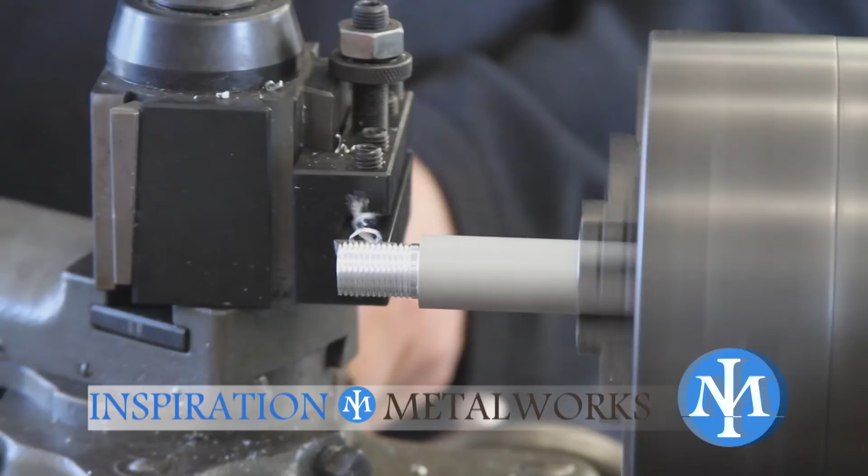Lately my videos have been all work, right? Still working on the frames, ran out of argon for that. Trying to decide if I want to do powder coat or just some other finish. So many things have come up lately, and frankly I needed a break. I needed something a little different.

I did start working on the tops for the tap handles. For those of you still with me on that one, I should have the tap handles in production this week. So the tops are done. Actually, these will get polished, but they're 12 gauge stainless.

Since I had the stainless up on the table, I thought, hey, wouldn't it be fun to do something different? In our last episode I did a poll for people to vote on, and thank you to those who did vote. It basically asked which one I should do: traditional shuriken, batarangs, or why choose, do both. Believe it or not, votes were either for the batarang or for doing both. In fact it was an even split - nobody said just do shuriken, and it was even between the other two.

So I thought, hey, that's pretty indicative of what we should do. I went ahead and cut a couple of these for now. I'll likely cut a whole lot more because it's quick and easy.

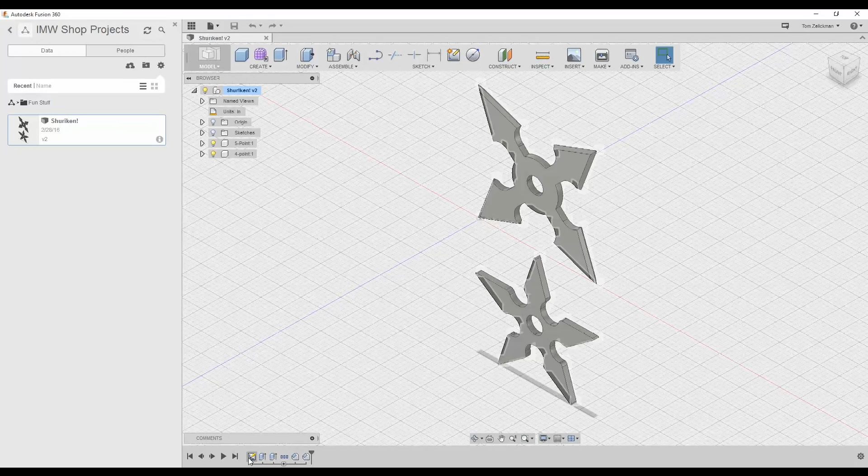Let's take a look at our timeline here, and let's step back. We started with our sketch, right? Let's roll back to the sketch. So here's our sketch - let's make our sketch visible, sorry. And we'll look at it from the front view so we can see it better.

Alright, so our sketch - effectively all I did was import the two SVG files. Those SVG files, the vector files like that, have all the same - it's effectively the same thing that a two-dimensional CAD drawing contains. It has the same thing, right? It's basically text-based, for those of you who didn't know that.

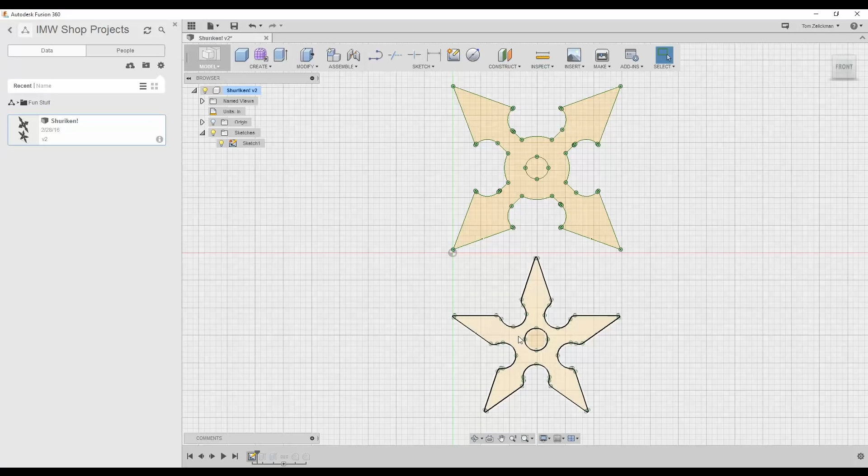Anyways, so you can see I brought that in, and basically we extruded them. Let's go back to our normal view so you can see. So I did the extrude, and then I just started playing around with it - adding different chamfers on here and things like that.

None of this was necessary. The important part here is actually at the sketch level. So let's turn the bodies off.

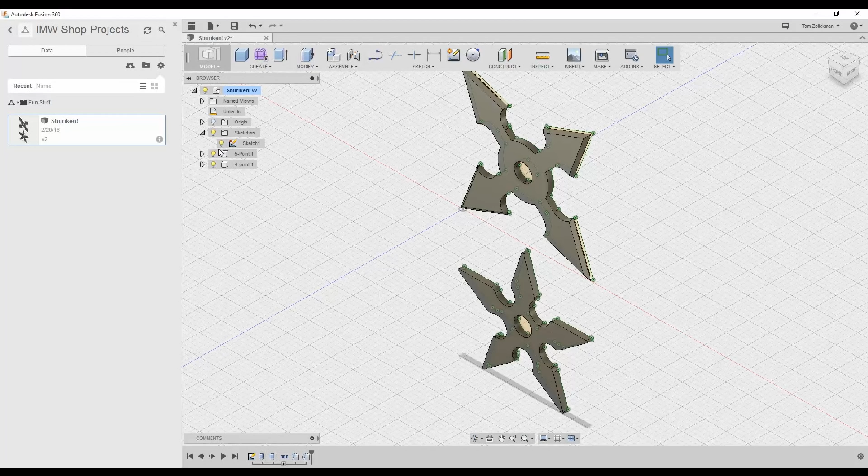We're looking at the sketches because what we need to do is right-click on Sketch and save as DXF. This was the important part for me moving forward because that DXF file is how we're going to get it into PlasmaCam. Everything else was more just to see what it was going to look like. The important part here is this two-dimensional drawing. I could have done this entire thing in the PlasmaCam Design Edge software, but I'm trying to get a bit more experience under my belt with Fusion 360, so I went that route.

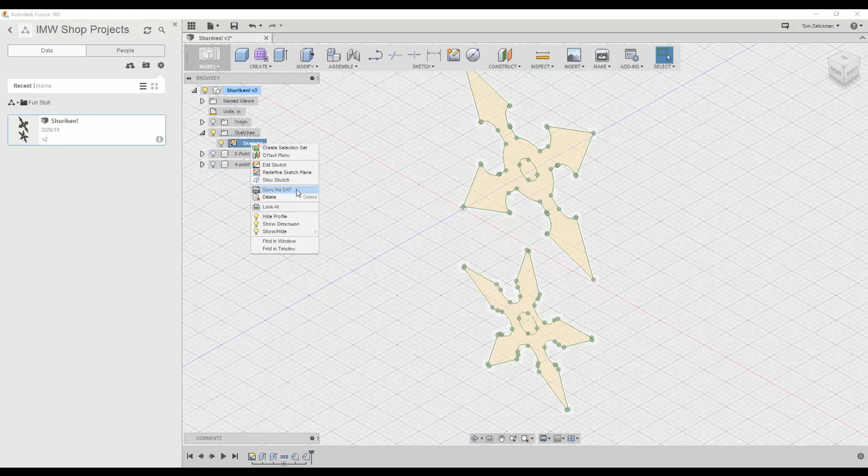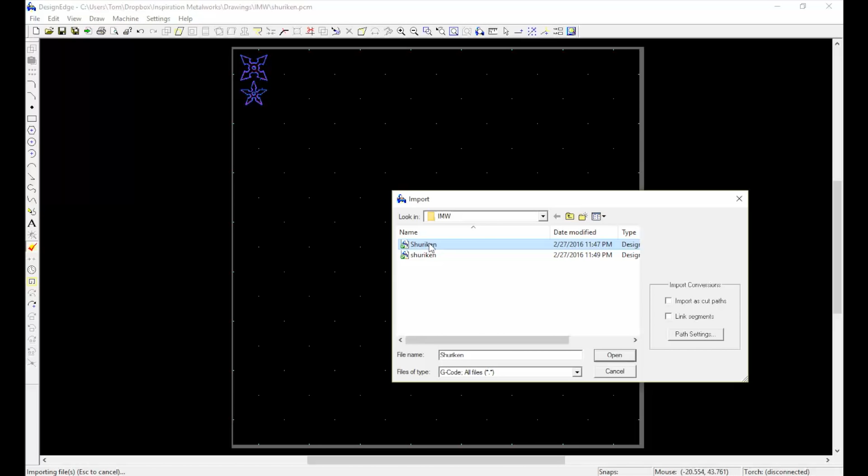So let's get over to the PlasmaCam system and take a look. Okay, so we've got our design in from Fusion 360, let's take a look at this real quick. The way that I did that is I did an import, and I had exported the design as a DXF file. Let's figure out which one is which. The early one would be the DXF, and all I had to do is click open.

Design Edge is able to take that DXF file in without any problem. It maintains all of the sizes and everything else that was in the DXF. So if you've got to do something with Design Edge and you're working with DXF files, just know that in general it does a good job, but let's take a look.

There's one thing to do. You see that? You'll see that it's white. It means that it's not contiguous. So if you select any part of it and press the J key, or this join or link command, it will bring the whole thing together. It changes the color. I'm colorblind, so I don't know what color that is. I think it's purple, no idea. So J, easy enough.

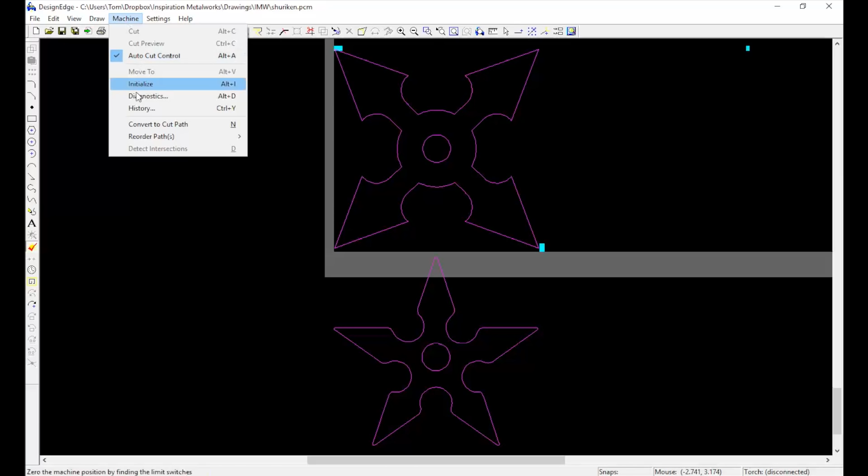N, or machine convert to cut path. N, that's how we do our cut paths. I'm going to put one here. Yes, I know I'm outside the table, and yes, I want to automatically cut that hole in the center. Boom, just like that, done. We'll do it again over here. Automatically convert, boom, just like that, we're done. Press escape when I'm done.

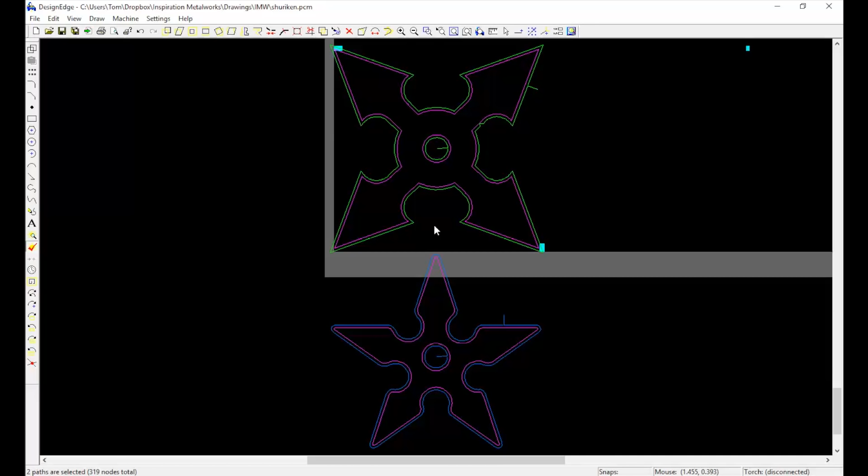And I'm going to look at that cut path and take a look. Let's zoom in here. See that? It saw this tiny little jagged part, and I don't like that. So I'll go in and clean up a couple things here real quick, and then we'll start cutting.